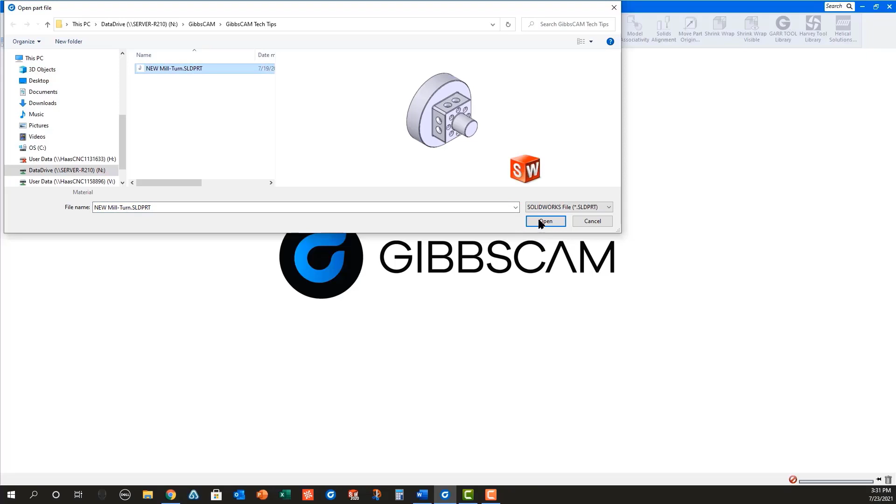In this case, I'm selecting a Doosan twin spindle as my machine before opening a SOLIDWORKS part file named New Millturn. Once the part is open, you will need to position the part properly in the main spindle. I find the easiest way to do this is to open the Coordinate Systems dialog and select XY plane for the main spindle. With Face Select turned on, select the front face of the part before right mouse clicking to align face to CS.

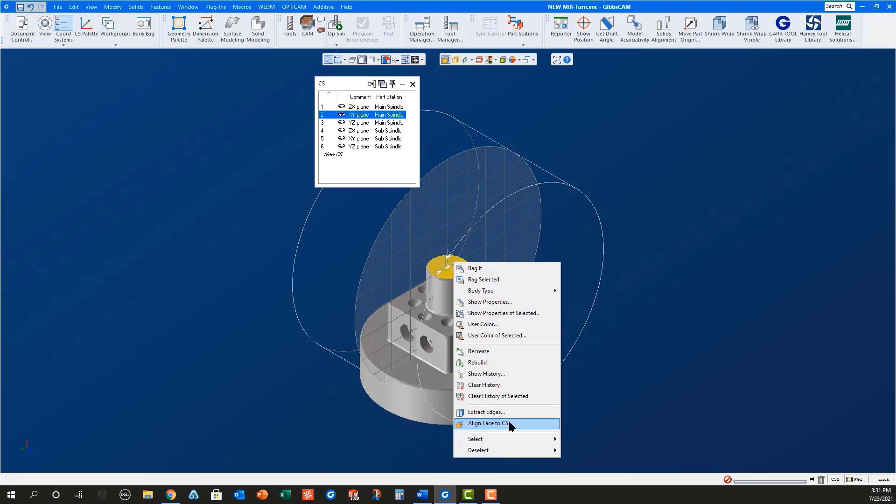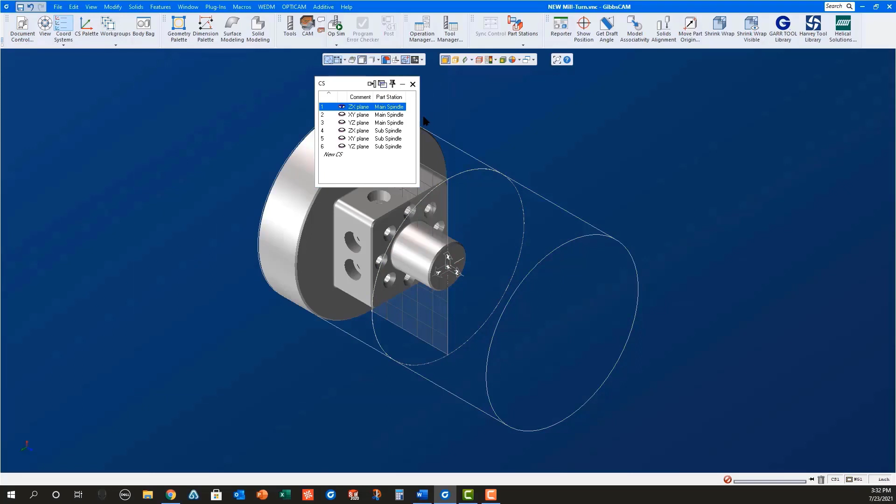Now use Modify Shrink Wrap to set the starting stock dimensions. Open the Document Control dialog and set the desired XD and Z clearance values, and then set the graphic part face distance to 0. Double-click the solid model to place it in the body bag and rename it Part in Main.

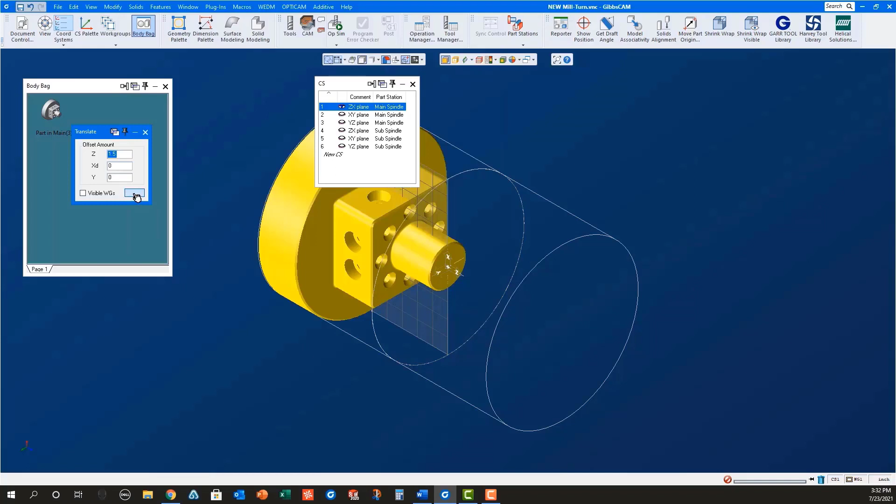Select the part in the body bag and use Ctrl-D to duplicate it. The new solid in the workspace is now selected. Use Modify Translate to move this new solid into position in the sub-spindle. This will always be the length of the part in the Z-axis as a positive value.

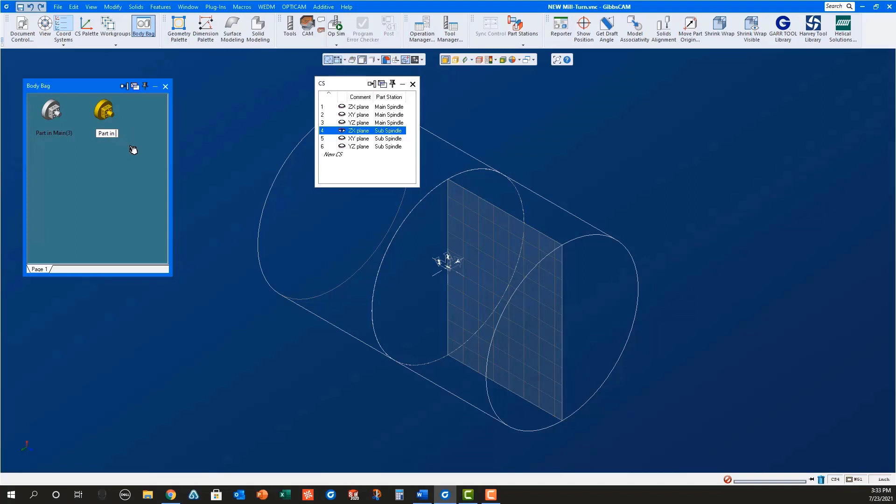Once this new part is in position in the sub-spindle, select the ZX plane in the Coordinate Systems dialog, right mouse click it, and change CS XYZ to make the solid belong to the sub-spindle. Double-click the model to put it in the body bag, where you can rename it to Part in Sub. Now double-click both solids to put them back into the workspace.

Open the Workgroup dialog. Rename Workgroup 1 to Blank since we will leave this unused. Click on New Workgroup and rename it to Check, as we will use this geometry to make certain everything is set up correctly for simulation.

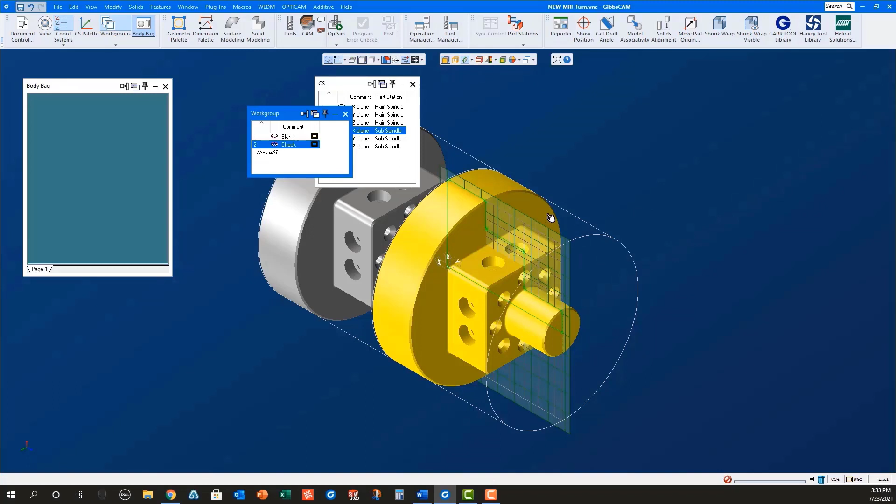With the ZX plane for the sub-spindle still active, turn on the profiler and Slice Spun Body. Select the green profile and then right mouse click on it to extract geometry. Now switch to the ZX plane for the main spindle. Select that green profile and right mouse click on it to extract geometry. Turn off the profiler.

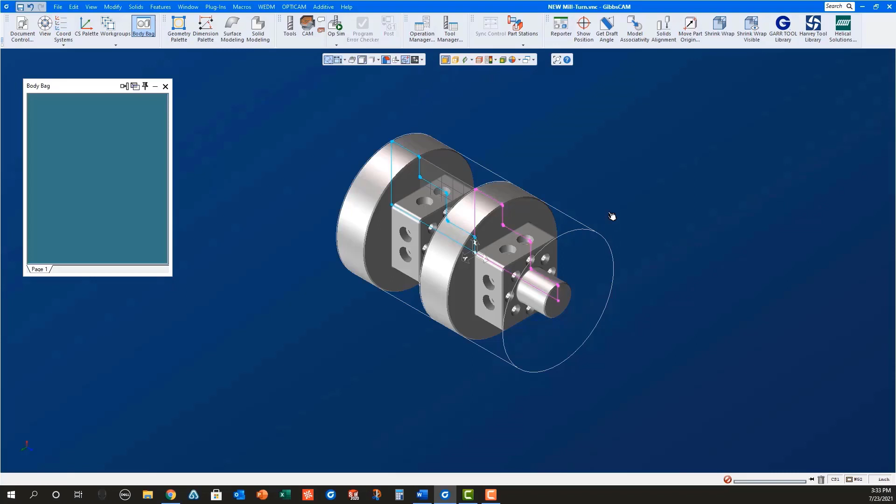Notice the geometry for the main is blue while the geometry for the sub is magenta. This is how GibbsCAM shows geometry in the active CS versus an inactive CS. Open the Document Control dialog and set the graphic part face distance to 2. Notice how the solid model and the geometry for the part in sub move with the stock for the sub-spindle.

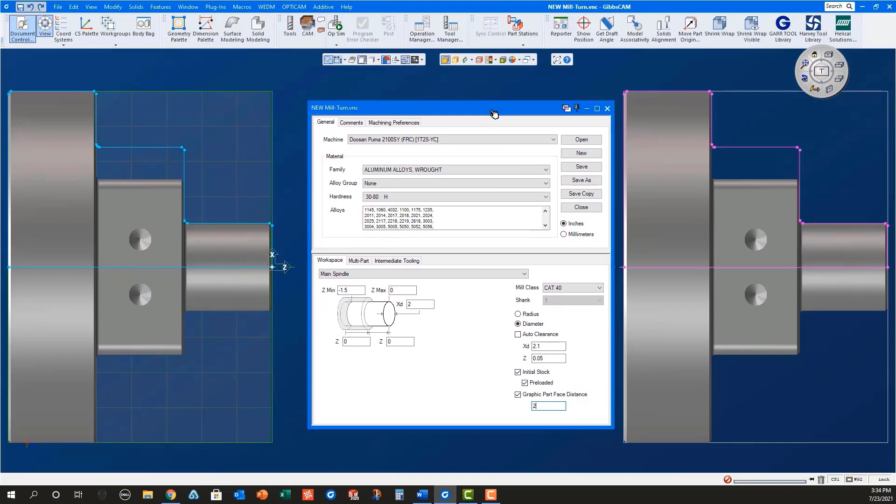While in the Document Control dialog, for the main spindle, set the Z max to 0.025. This will be the stock to remove with facing. Set the Z min to Z minus 1.65, which is the length of the part plus cutoff tool width plus stock amount to face in the sub-spindle.

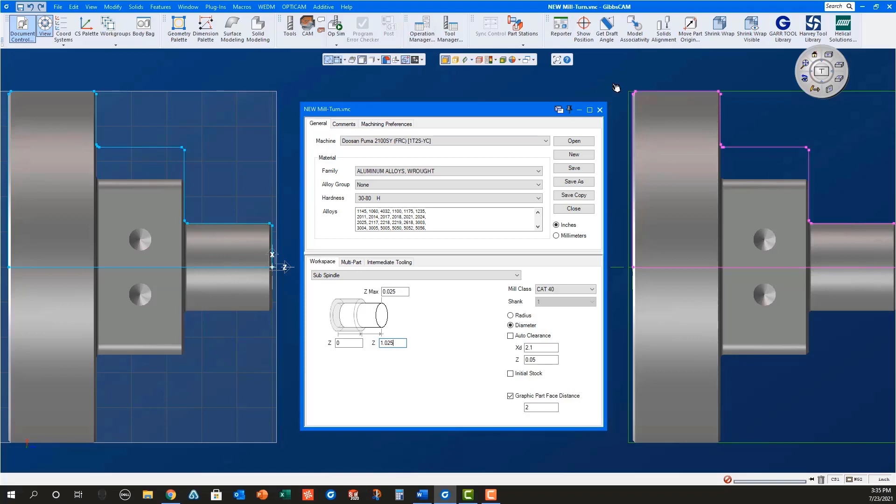For the sub-spindle, make sure Initial Stock is unchecked, since the stock is being transferred from the main spindle. Also, for the sub-spindle, set the Z max to 0.025. This will be the stock left by the cutoff tool to remove with facing. Set the Z stickout length to 1.025, holding on to 0.5 of material with the sub-spindle, with the part being 1.5 long plus 0.025 stock for facing with the sub-spindle.

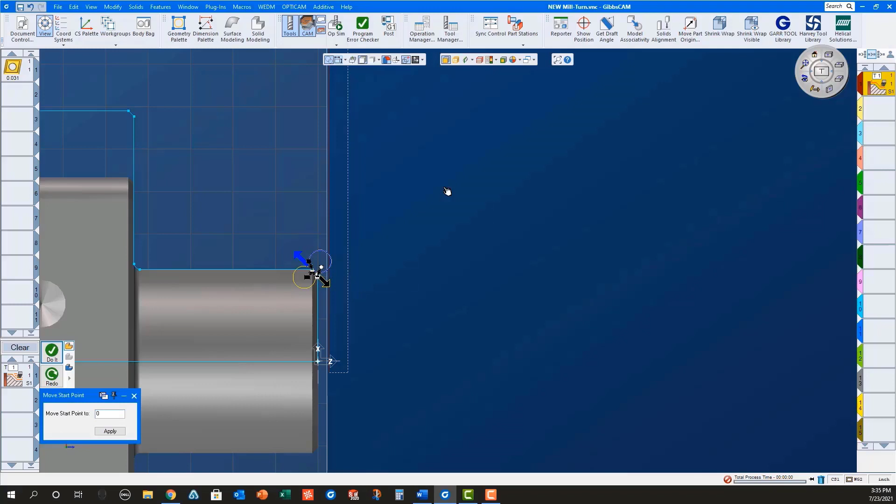Now that everything is set up correctly, we will program the part. First, I will load a facing process for the main spindle. Select the geometry, set the machining markers, and do it. Then I will load a turning process for the main spindle, select the geometry, select the machining markers, and do it.

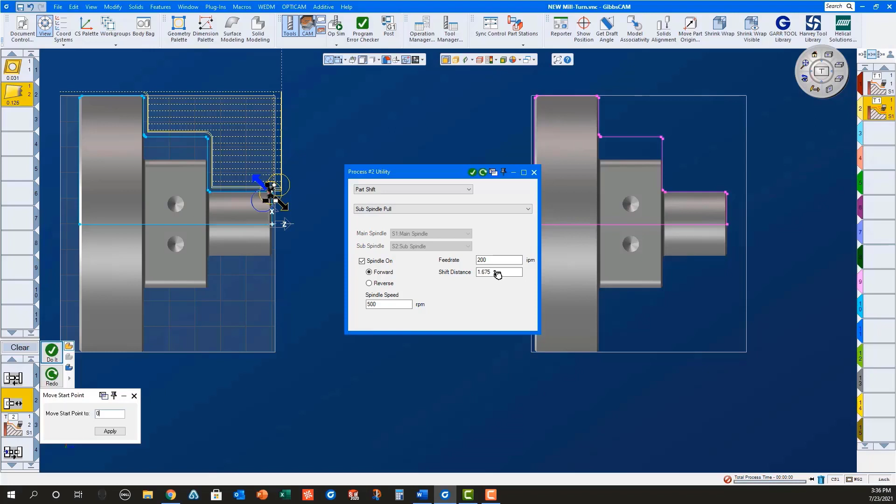Next, I will load all of the processes for picking off the part with the sub-spindle. These consist of a sub-spindle in process to a grip Z of 0.5, a sub-spindle pull with a shift distance of 1.675, which is part length plus cutoff tool width plus 0.025 stock for facing on the sub-spindle plus 0.025 stock for facing the next part, a contour part process with cutoff selected, a sub-spindle return with part in main.

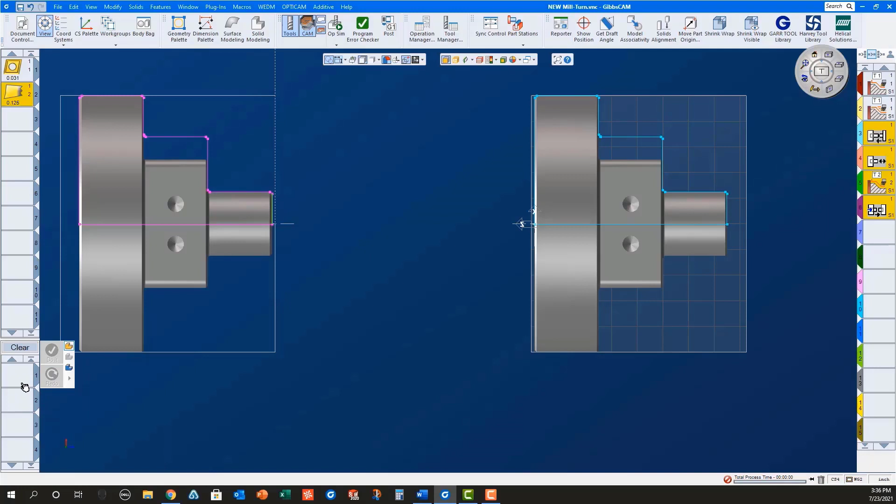I will select the geometry on the front of the part for the cut-off contour operation, and then do it. Finally, I will change the ZX plane for the sub-spindle, load a facing process for the sub-spindle, select the geometry, set the machining markers, and do it.

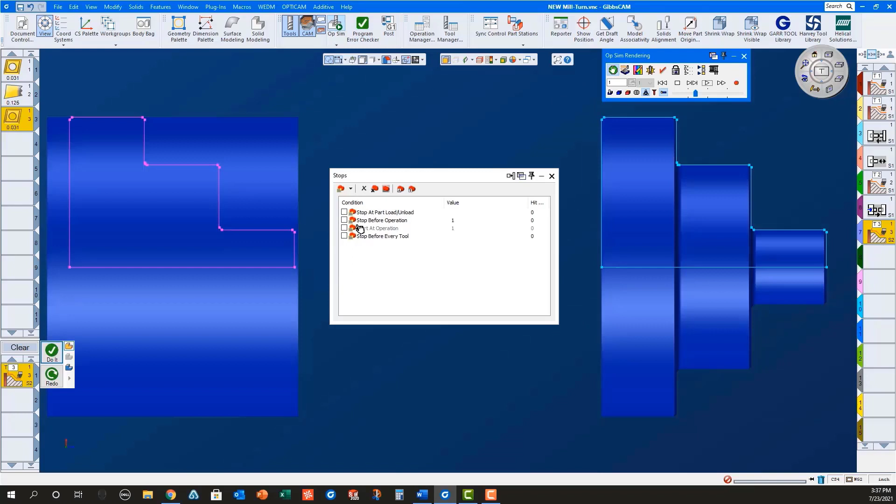Using OpSim rendering with stop at part, load, unload selected, and overlay geometry turned on, I can clearly see that everything is set up correctly for machining in both the main and sub spindles.